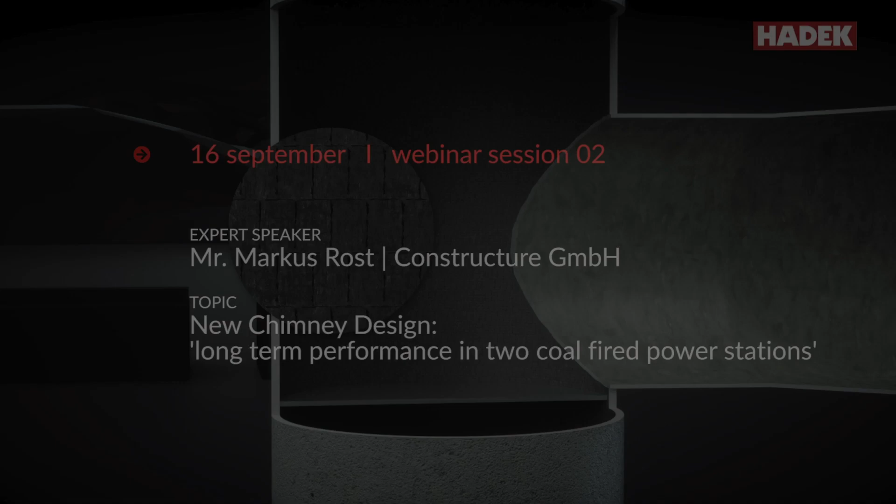One big question that comes up is how do these chimneys perform in the longer term? This is the topic that we will be hearing about today.

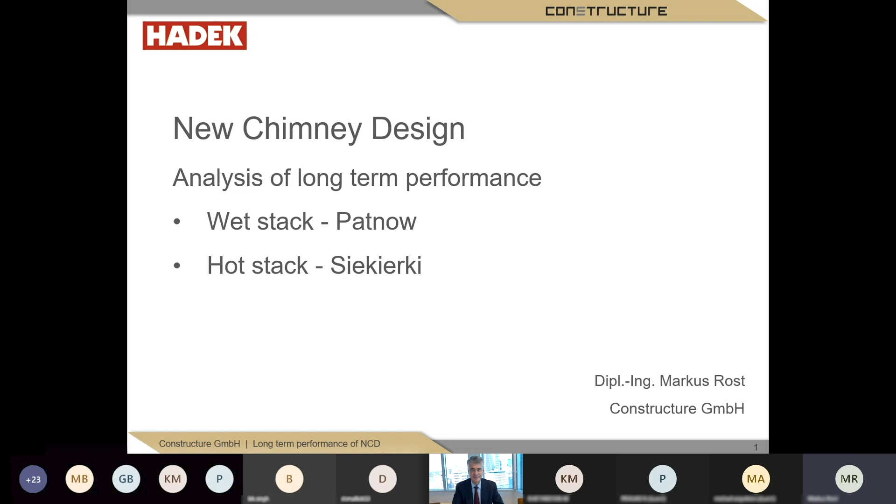The presentation will be structured as follows. At first, Albert De Krij gives a short introduction, then he will hand over the presentation to me, and I will introduce you to some structural characteristics of the new chimney design, going over to our inspection procedure on the two new chimney designs in Poland. We assessed their condition after several years of operation: on one hand, a wet stack located in Patnow, and a hot stack chimney in Siekierki in Poland. At the end of my presentation, I close with a short conclusion, and after the presentation we will have sufficient time to discuss questions.

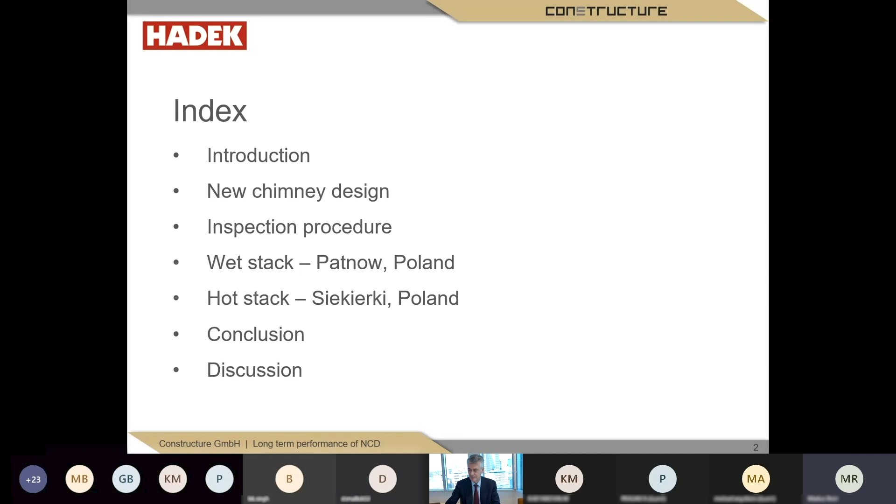The new chimney design, abbreviated NCD, I would like to describe in comparison to other chimney types. Maybe the most common one from the former time is called type 1, a reinforced concrete chimney with a brick flue gas duct, a single brick flue gas duct supported on platforms and having a ventilated space between the flue gas duct and the reinforced concrete windshield. The duct barrels themselves are supported on steel or reinforced concrete platforms on different levels.

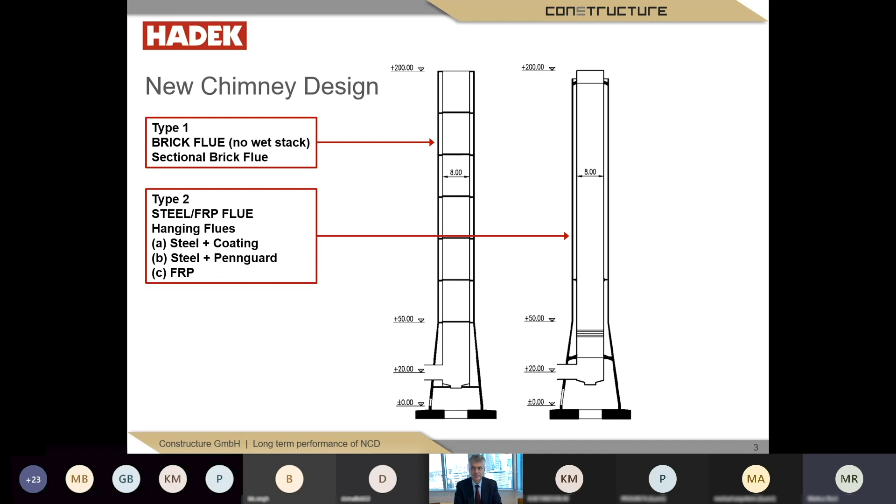A second option for a single flue chimney is to work with a steel or fiber reinforced plastic lining, usually hanging at the very top of the chimney, supported at a steel platform, with a compensator at the bottom of the cylindrical part shortly above the duct area. The corrosion protection for the steel part can be provided with some kind of coating, when usually an outside insulation is additionally required, or with the Pennguard block lining system on the inside, which includes both the corrosion protection and the thermal insulation.

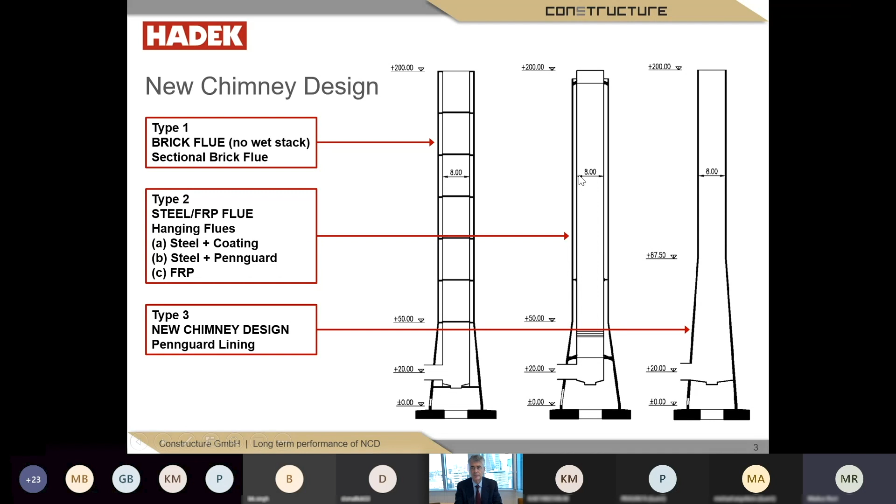And last but not least, we have the new chimney design, which does not have a real flue gas duct inside. The windshield takes over both roles, the structural part of the chimney and also the flue gas duct. The insulation and corrosion protection is provided with the Pennguard block lining system, without having a ventilated space between the lining and the windshield. This results in slender chimney structures.

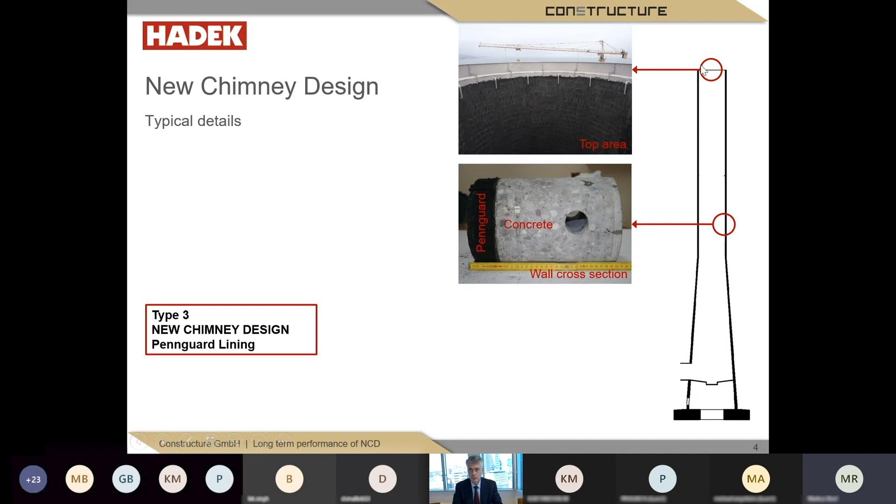Typical details for the Pennguard block lining system are the single wall. You can see here clearly the concrete windshield with the jacking rod channel. The chimney is slid by slip forming, and on the inside is the Pennguard block lining system. At the very top you can see the inside surface of the chimney with the upper part, which is some kind of condensate drain and a protection of the concrete part at the very top, collecting the drops that may occur there.

And the bottom part with the duct entrance, the wings which guide the flue gas stream in the right direction, and there's a hopper and a floor at the very bottom. You can see here clearly the Pennguard block lining system is put not only into the windshield but also the duct area is cladded with this product.

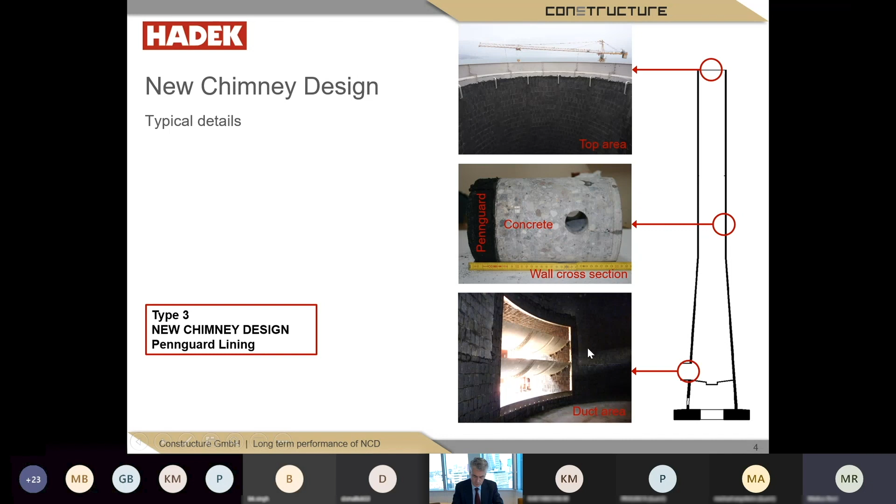The next chapter covers what we did, or how we were supported during our inspection. We assessed the windshield from the outside, especially regarding cracking, but also checked the overall condition. An inside inspection has been done from the duct area and the top area, and we were supported by photographs from a team which also did the inside inspection in the regular area.

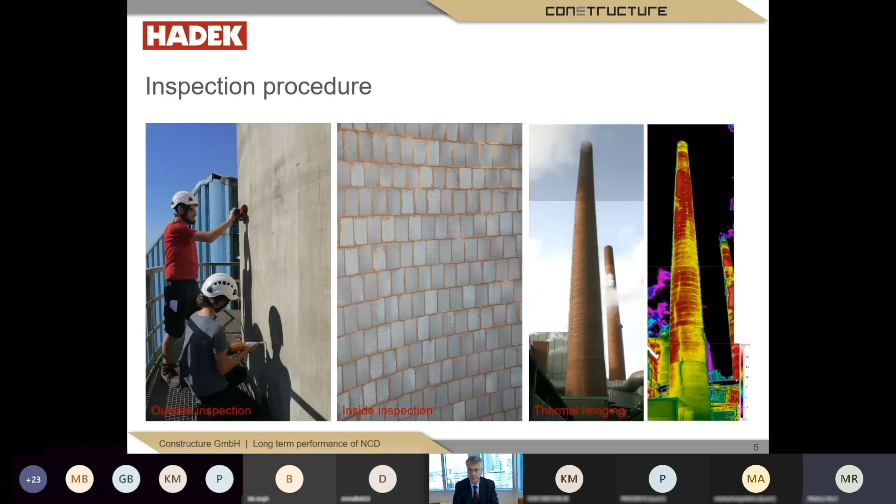Since one chimney was in operation, I give here an old example of a brickwork chimney. We did thermal imaging, which is very suitable for inspection of new chimney designs, because if a crack occurs in the chimney where cool ambient air is probably sucked in, you can see it clearly here as light colored cracks. And if there were, for example, continuous wear of the thermal insulation on the inside, you can see it with hotter areas on the surface. Since the new chimney design does not have a ventilated space, you can detect deficiencies quite directly via thermal imaging, in comparison to other chimney types, where the chimney has to be taken out of operation to do an internal inspection.

Here you can see the first chimney we inspected. The chimney is located in Patnow in Poland. It has been erected in 2006 and has a height of 150 meters. The height of 150 meters allowed the operator to build it in a cylindrical shape with an outside diameter of about 9 meters.

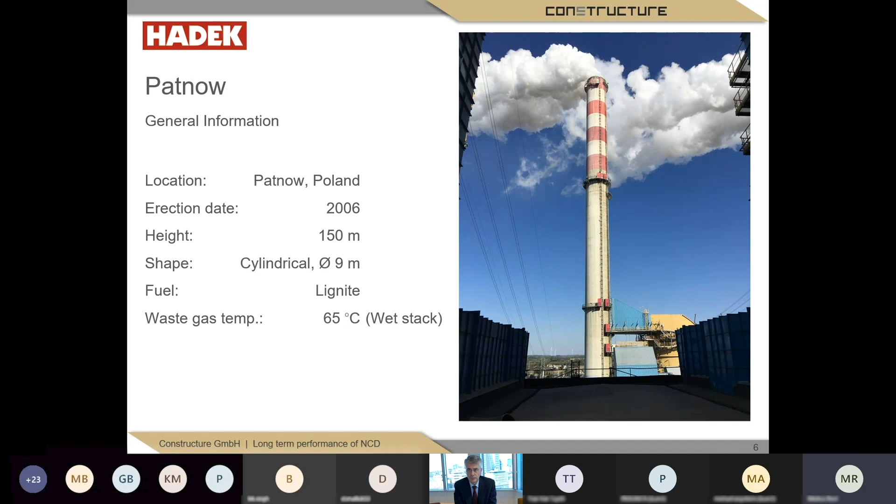The fuel of the power plant is lignite, and as you can see on the picture on the right hand, it is a wet stack with water saturated flue gases and a flue gas temperature of about 65 degrees centigrade.

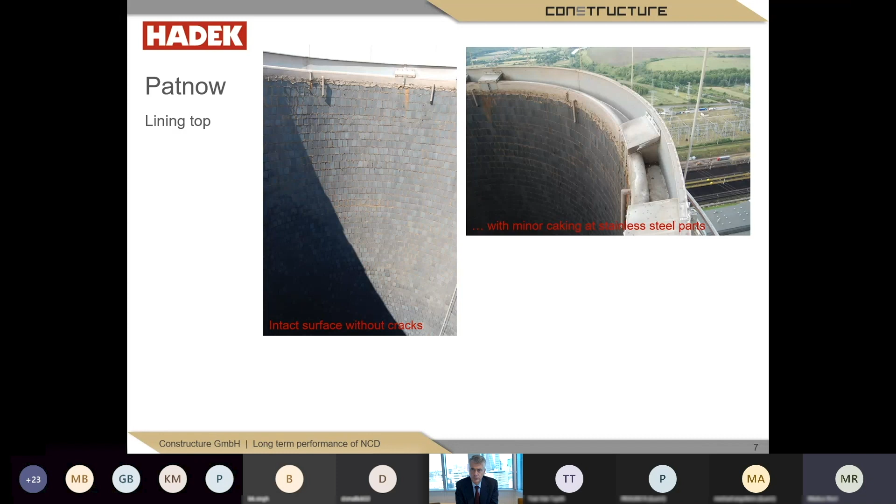Here you can see the first pictures after more than 10 years of operation from the very top. We did a lot of photographs, here is a short selection. What you can see is we have intact internal surface without cracks and with minor caking at the stainless steel parts, but nearly nothing, no dust on the inside of the lining surface. We have no corrosion on the steel parts, and after 10 years of operation it's quite clean at the very top and without any visual damages.

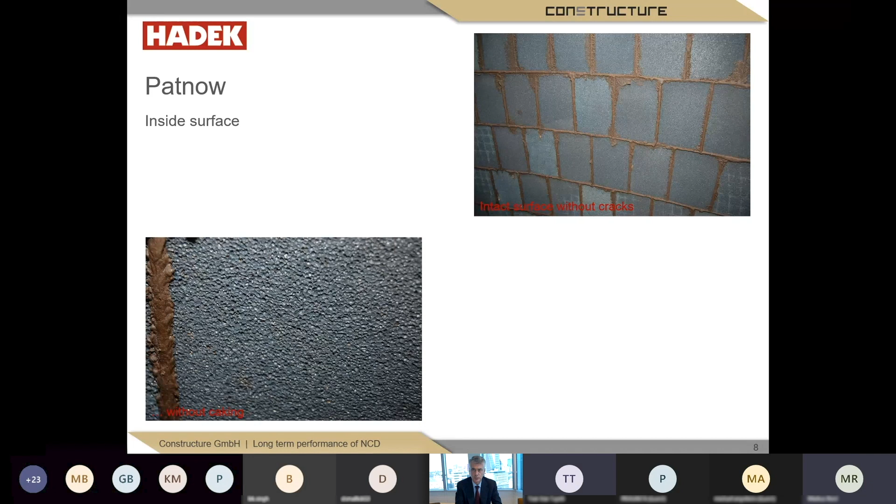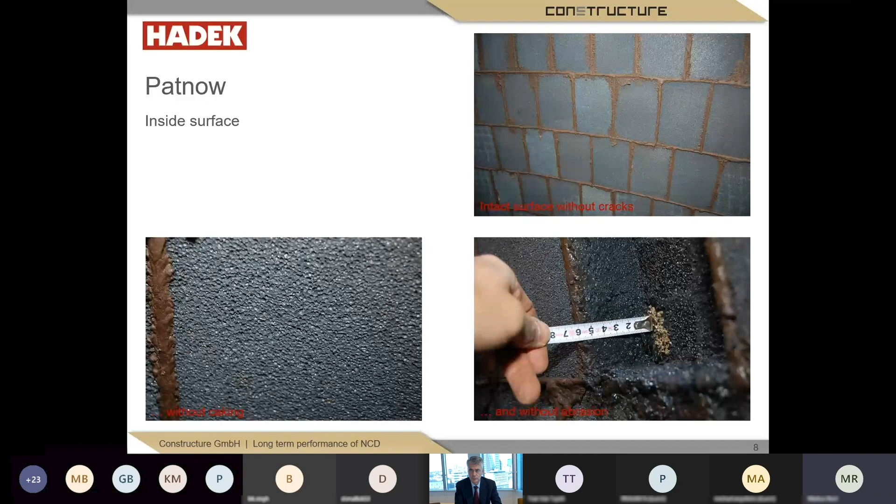We got photographs from the inside surface, and here you can see that the Pennguard individual blocks are intact without crack. You can see the adhesive at the edges of each block, which is still there and was flexible. You can see a detail of a block surface with the pores, and there we have no dust deposits. Comparing it with the joint on the left hand, you can easily see there's no wear off, no abrasion of the internal surface. This has been proven by taking out one block to check the remaining thickness of the Pennguard block lining system after more than 10 years of operation. It is still 2-inch thickness there.

On the next page, you can see the thermal imaging of the duct area. What you can clearly see is the area when the inside surface is subject to hot flue gases, because below the hopper everything is cold. Above you have a uniform temperature distribution on the surface, and we detected no suspicious areas where the Pennguard block lining failed. In the compensator area, you can see there is a lack of insulation, and there the temperatures are a little bit higher, but this is not an issue of the Pennguard system, but of the compensator.

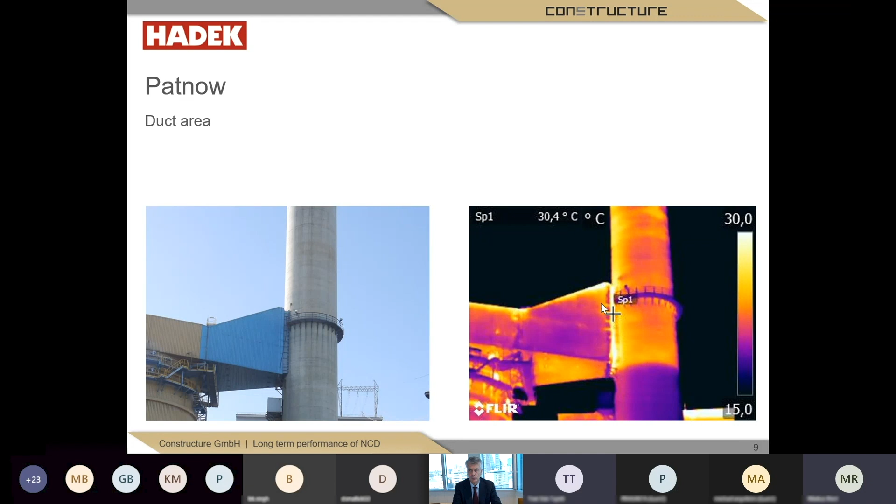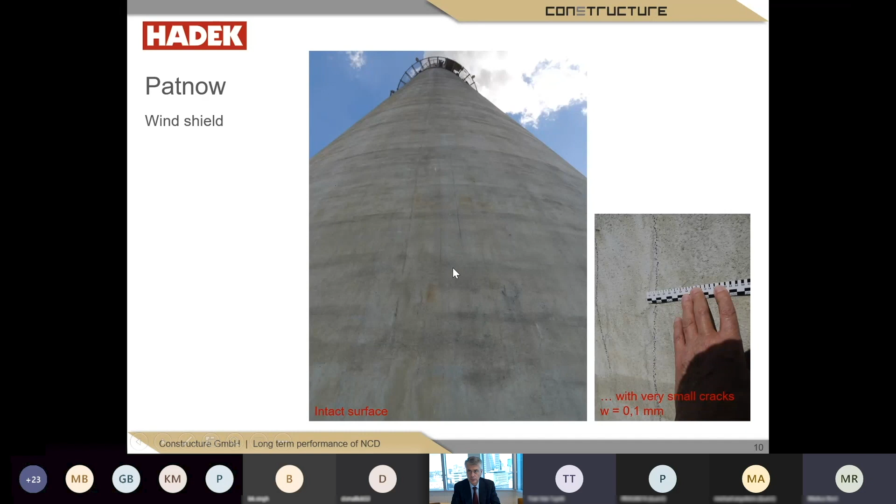Last but not least, we did an inspection on the windshield. Since the windshield is exposed to ambient temperature on the outside and flue gas temperature on the inside, it is important that the thermal insulation of the Pennguard block lining system is sufficient and the reinforcement of the shell is okay. Here you can measure the function of the windshield by the width of the cracks. On the chimney, we found only very small crack width of about 0.1 millimeter and uniform distribution of these cracks on the circumference. So the reinforcement corresponds with constraints caused by the temperature difference from inside to outside, reduced by the thermal insulation of the Pennguard block lining system. So we detected no deficiencies on the windshield caused by cracking.

The second chimney we have inspected is located in Siekierki, also next to Warsaw in Poland. The erection date was about 2009. It's a power plant chimney with a height of about 170 meters. The increased height required a conical bottom part of the chimney with an outside diameter of about 10 meters. The fuel of the power plant is hard coal and biomass. It's a hot stack with a waste gas temperature of about 140 degrees centigrade.

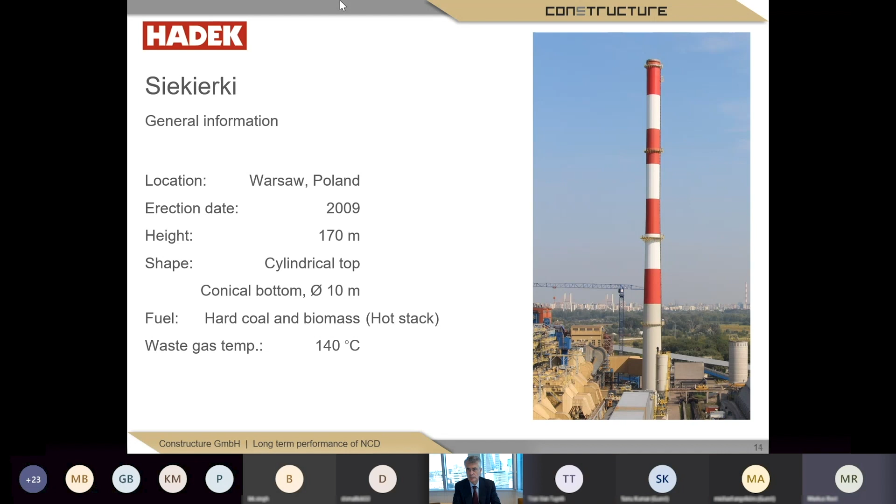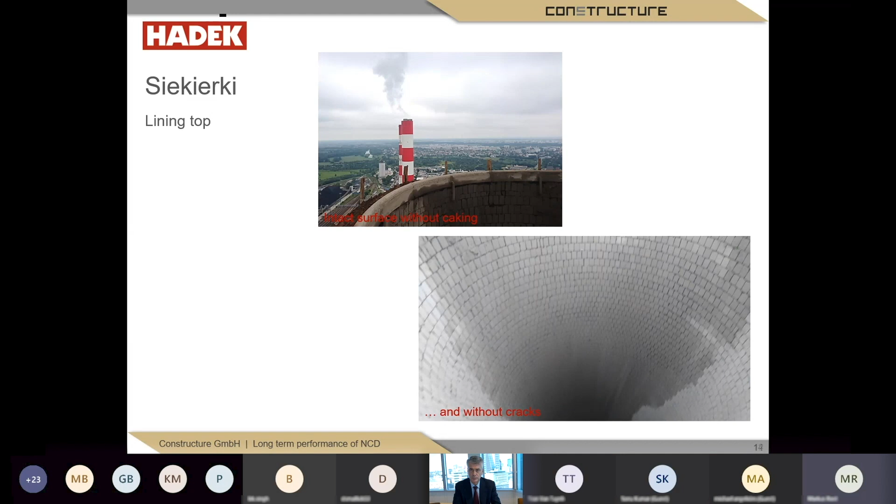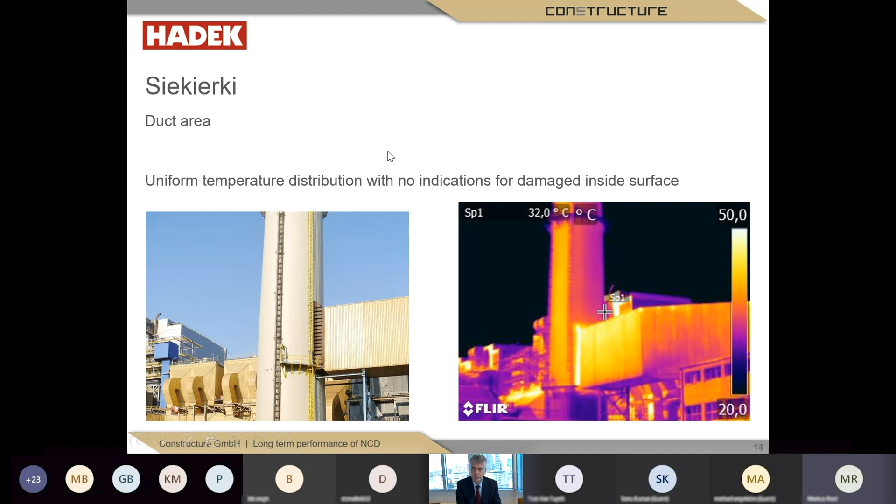As shown, this well describes the findings on the chimney analogous to the first one, starting with the very top. You can see here as well an inside surface without caking and also without cracks, in quite good condition. The thermal imaging we did of the entire chimney, focused on the duct area, revealed no deficiencies of the inside block lining system. As discussed before, the hot spots on the chimney are caused by the weaker insulation of the compensator in the duct area. So we found a uniform temperature distribution with no indication of damaged inside surfaces.

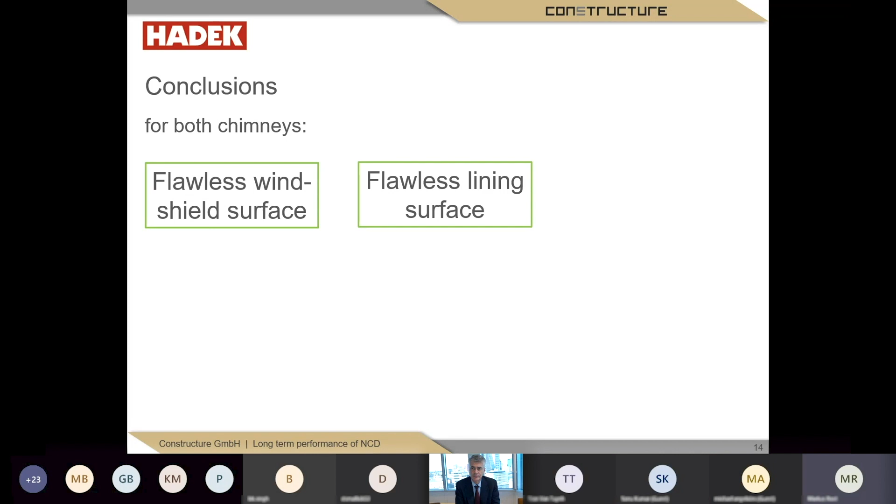The conclusion for both chimneys can be described with three headlines. We detected on both examples flawless windshield surfaces with cracks of very limited width of about 0.1 millimeter, which is fully acceptable and quite typical for this new chimney design, and in accordance with all requirements of the individual regulations. This is the result of the flawless lining surface. We detected a Pennguard block lining system surface without damages, without caking on it, and with tight joints and flexible adhesive. The adhesive is the second component of the Pennguard block lining system, which works together quite reliably with the blocks to hold them together in an elastic way, because it is necessary due to the thermal actions, the thermal load on the block lining system, which requires a certain expansion.

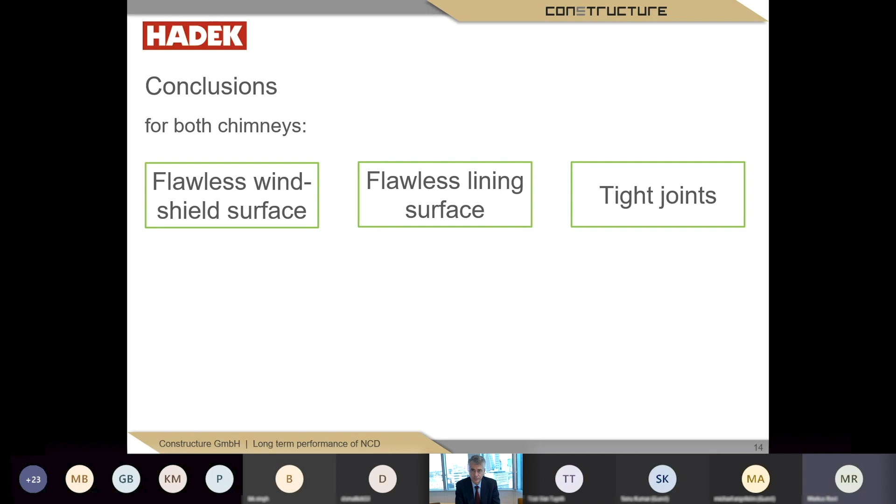It was quite easy for us to assess these new chimney designs with the help of the thermal imaging, which revealed every potential failure of this block lining system, with additional help from the inspection of the duct area and the top area, which was very easy to provide via the regular ladders and staircases. So at the end of the day, internal inspection of the lining is not really necessary.